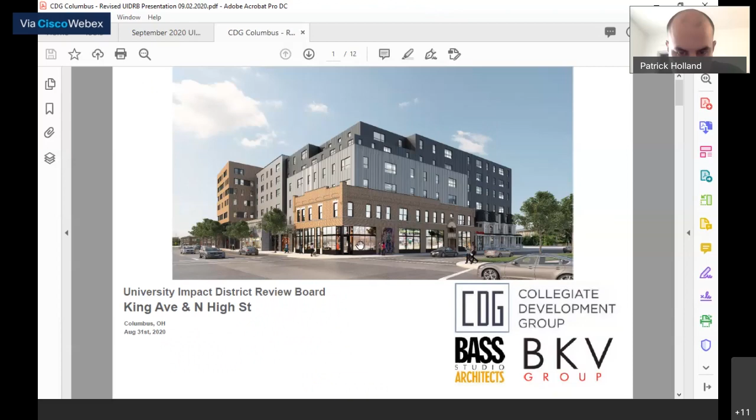Hey Patrick, I'm sorry to interrupt, but your screen is gray for all of us. Oh sorry, I thought I was sharing. I think you are, but it's not coming through for some reason. Maybe try to start over. It was initially up. Okay, let me try it one more time. Are you guys able to see that? Yep. Yes. And what about now? No. Yes. No. Okay, well, are you guys able to see it? Yeah, there's a... I'll share, Patrick, and that way you can focus on your staff report. Okay, all right, thanks Christopher. Do I need to send you posting? I got it, or the share? Okay, you got it? Yep. You can just stop sharing, and then he can take over. Thanks Christopher. Yep, appreciate that.

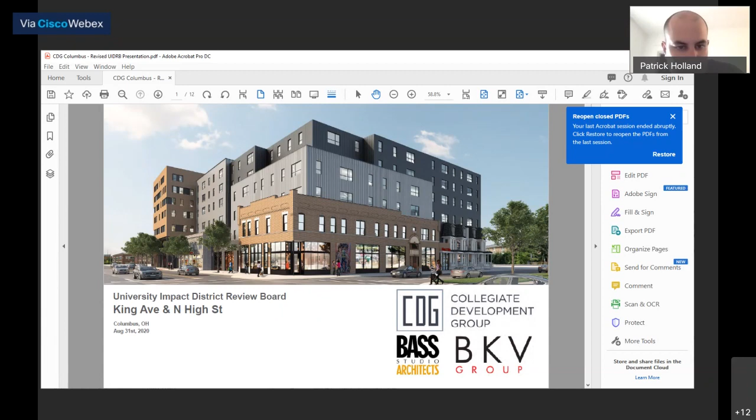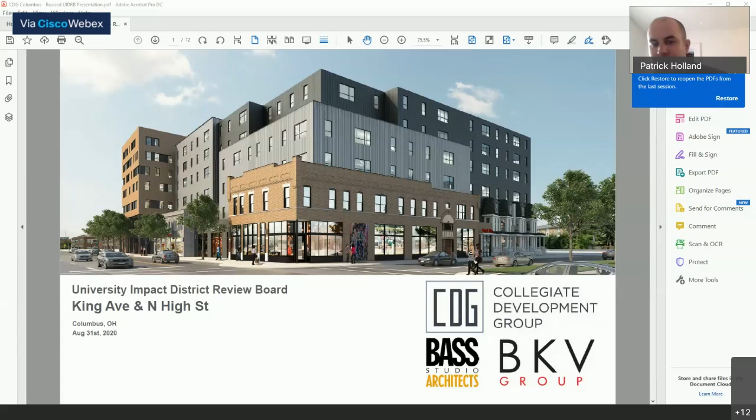Great, okay, sorry about that. Staff notes that the council variance is not dependent on the site plan, but if approved, the height variance can be applied to any portion of the site. Design review is required to go before the UIDRB, but I know that was a question we had previously.

Christopher, if you go to page 2, you can see the changes of the project. The applicant is also requesting a conceptual review at the next hearing for the proposed design and the massing, but they would like a vote on the council variances.

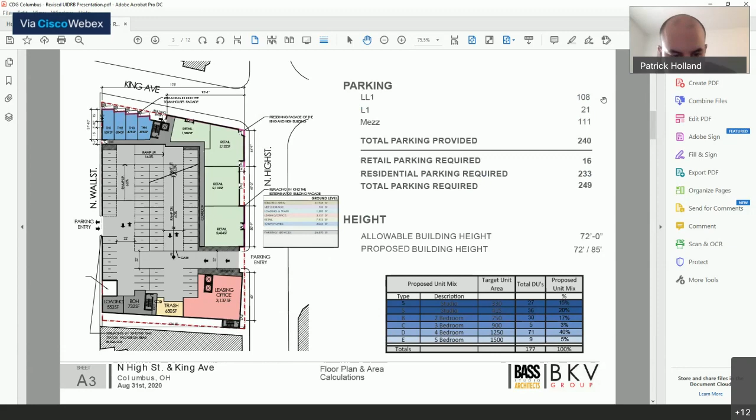Staff is generally in support of the proposal and views the incorporation of preservation as a mitigating factor for the proposed height and variances. But staff acknowledges that the proposal does not preserve entire buildings, and notes the benefits of preserving the character through the proposed design, and that this level of preservation will benefit the character of the area. Staff also notes that the existing buildings on site are not protected by existing code.

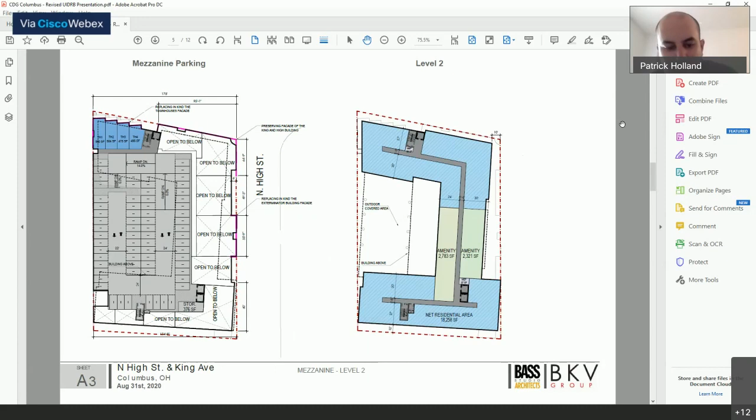So I'm going to walk through a brief summary of the board comments and revisions to the project over the past year, and then we can have a discussion from there.

In July of 2019, the board did not initially feel that the project benefited from the facadectomies, and did not consider them preservation or necessarily worthy of a height variance. They had asked the applicant to look at how the proposal impacted the surrounding neighborhoods, and suggested moving the tallest section to the middle of the site.

The board presented two options: preserving more of the existing buildings, or clearing the site and designing an interesting quality project. They came back in September 2019 for the second revision, and there were concerns about the south elevation near the row houses, so they could support height variances with the appropriate conditions. They also noted that density is controlled by height, and there are no density regulations. They also said there wasn't enough explanation on why the height variance was needed for preservation of two buildings. At this point, the applicant was only preserving the two buildings at the King and High facades.

In November 2019, the applicant came before the board again and presented a completely new build in response to comments from July 2019, and that one option is to design an interesting high-quality project without preservation. In response, the board requested to see some preservation, and was not opposed to additional height if the applicant preserved more than one building. The board also thought previous proposals were more appropriate and should be developed further.

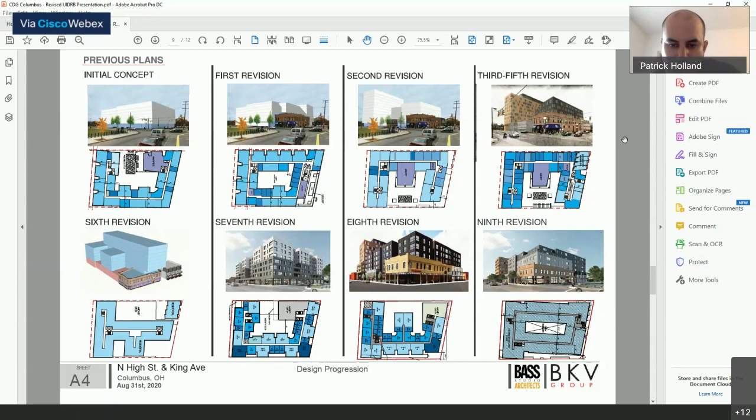All right, let's simplify this and cut to the chase. I see nothing in this proposal that changes my opinion about the project. It goes back to the very first time they presented to this board: they have never presented a compelling argument as to why they deserve more bulk on the site than current zoning gives them. The only thing they've used as the basis for that argument is that they are somehow preserving the historic fabric of the site, which a number of board members have questioned, given that the only thing being kept are the two facades of the building on King and High.

A number of us have expressed that we weren't opposed to height in general, but there needed to be a compelling reason for it and a compelling design that put the height in the right location. So I've got two problems with this proposal. One, I still don't hear a compelling argument as to why they deserve more bulk than what the current zoning gives them. Two, they're putting the additional bulk to the south and west, where it will negatively impact a two-story single-family residential neighborhood to the west and two-story townhouses to the south.

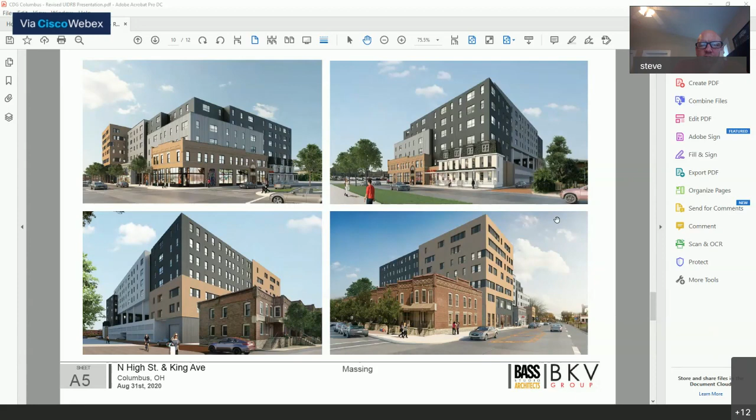This one was voted on by us a month or two ago at the longest. My thought was that they were coming back with changes. What are the changes? Can you just summarize what changed since the last time we voted no?

Christopher, go to page 2, the changes should be laid out there based on previous comments. The previous proposal was 11 stories; it's been reduced to 6 and 7. Three-quarters of the building along High Street are at 6 stories, which is 72 feet, and one-quarter of the buildings along High Street are at 7 stories, at 85 feet.

Previously it had 306 units, and currently it's 177. The preservation elements maintain all the elements of historic preservation previously proposed, including preserving the facade at King and High, replacing in kind the Exterminator building facade, replacing in kind the townhouses facade, and replacing in kind the gas station facade at the rear entrance.

Let me caution - and then you go ahead. I was just going to finish the layout changes too. They maintained the first floor design along King and High, reduced the height and improved articulation, and also stepped back the corner on King and High at the 6th floor an additional 10 feet.

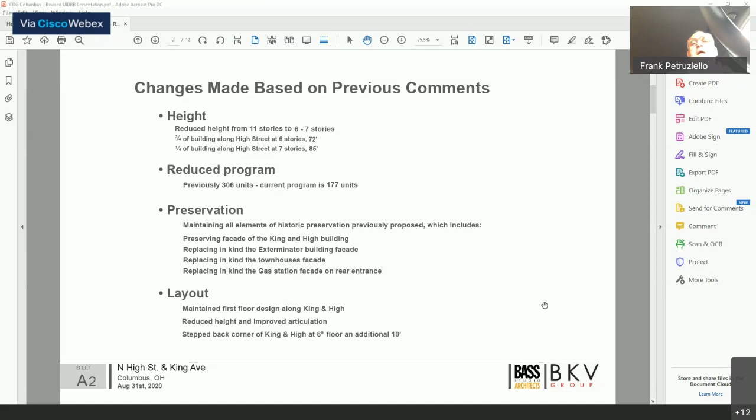I want to caution you about this height table - you have to read it closely. It says three-quarters of the buildings along High Street are 6 stories and one-quarter are 7 stories. That is not three-quarters of the site at 72 feet and one-quarter at 85 feet. In fact, the entire southern and western perimeter of the site is at 85 feet.

I would also caution staff about uncritically accepting their use of the term historic preservation. You may want to talk to your colleagues at HRC. We can argue whether preserving the east and north facades of the King and High building constitutes preservation or not - I don't care, I can let that one go. But demolishing 3 buildings on site and then rebuilding something that kind of looks like them is not preservation. So if they want to do that, fine, I don't care, but don't make it an argument for historic preservation.

If I wear colonial clothing and put on a white wig, I'm not George Washington. Understood - I would like to see that though, Keone. Halloween's coming up, you know? You have a cherry tree, Frank? What's that? You have a cherry tree? Yeah, that needs chopping.

Where I am with this is that the design is totally immaterial to me, really, and how much is preserved or not is in many ways immaterial to me. It's just, if I were designing this building, I would like to have some leeway into height for design purposes, articulation purposes, as long as I gave up some height in other areas to compensate for it. All the stuff they mentioned as mitigating reasons is beside the point as far as I'm concerned.

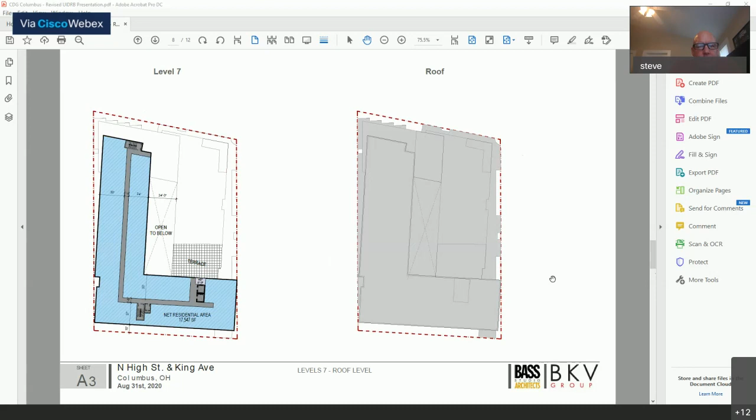I object to them because it seems that's what they're pinning their desire for additional bulk on the site on. I think Frank has provided a very good compromise for the applicant to get to their goals: if they want 85 feet on some portion of the site, they need to accept a reduction on some portion of the site, because we have yet to hear a compelling argument for just an increase in bulk on the site. They need to separate the design from the zoning variance, since they're the ones conflating the two. If the zoning variance is about view triangles, residential use on the ground floor, those are all fine - I don't think any of us have huge issues with them.

If they want to come back to the meeting and say, hey, we'd like to build taller than 72 feet because we think we're going to get better units, or it's going to be better for the site, but we accept that we need to trade off, and so we're going to reduce bulk on other portions of the site by a commensurate amount - once we get the variance done, we'll come back to you with a design to talk about it based on past variances. That to me seems like a reasonable path forward.

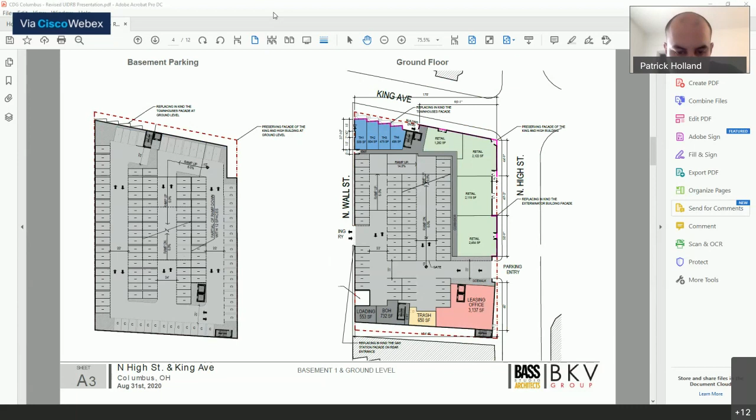I just realized there is a complication to the calculation. You could potentially, if it's written badly, you could game it. In other words, if the light well is assumed to be 0, you could see it as a credit, but it has to be written such that we're talking about building volume here, not about vacant ground floor space. Do you know what I mean? Because I think you could game it.

And Jackie, that's why you're cautioning us, correct? Yeah, I'm just saying I think this is great, really good discussion, and this gives us time that we can check in as staff, I think Kelsey Preby is on this case, and the applicant can as well, and we can have those discussions ahead of the hearing. So yeah, this is all really helpful and good comments. So thank you.

Any other comments? I'd like to hear from Mike. Mike Shannon? Yes, okay.

Mr. Chairman, members of the review board, I mean this with all due respect. I have participated in dozens of business meetings, and 90% of the time, number one, I'm not afforded the ability to talk. Similarly, there are never substantive discussions about the merits of the application. It is a matter of getting things ready for the agenda. Having said that, I appreciate everything that was said. There are a lot of misconceptions here that I won't try to address now in the form of a business meeting, but I do feel compelled to make a couple brief comments.